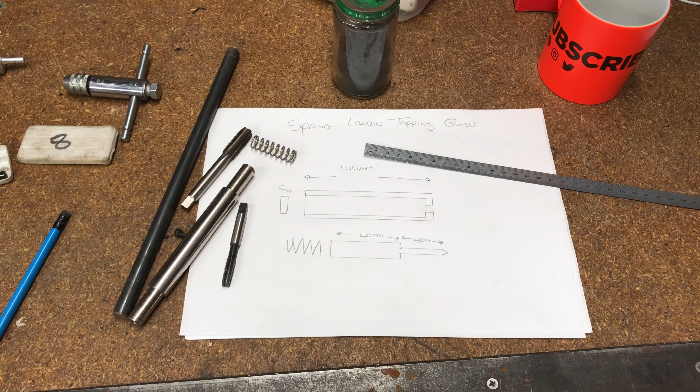I've been going through the scrap bin, and today I'm going to make something that I've sort of needed for a while but managed without it, and that's a spring-loaded tapping guide for both my lathe and the pillar drill. Most of the stuff I've already got. There's a little CAD drawing I've done.

The idea is I'll have a barrel about 100mm long. I'm going to drill it out to about the diameter of this steel, which is 13mm. It's only mild steel. Couple of springs, put a cap on the end of the barrel. This is, I'm going to call it a piston. It's not going to act as a piston, but nevertheless that's what I'm calling it. That'll be a snug fit inside the barrel, be spring loaded.

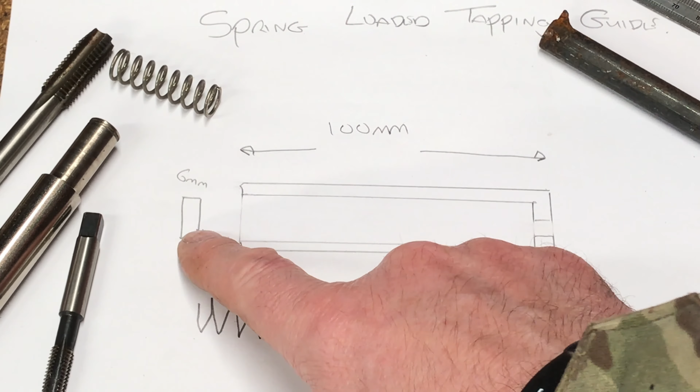I haven't got the necessary tap and dies to put a screw on end onto this device, so I'm just going to have a push in steel cap. So once it's in, it's in. When I say a steel cap, it's going to be like a steel bung. It's going to be press fitted in there with my 12-ton press.

And the idea of this, as you're probably aware, what I'm going to use it for is squaring up taps as I make threads in steel tubing, etc., or plate. So rather than having a drunken thread going in, hopefully this will be a little bit squarer. I have managed, like I said, but there's some scrap lying around the workshop, so there's nothing wrong with repurposing, and that's what I'm going to do.

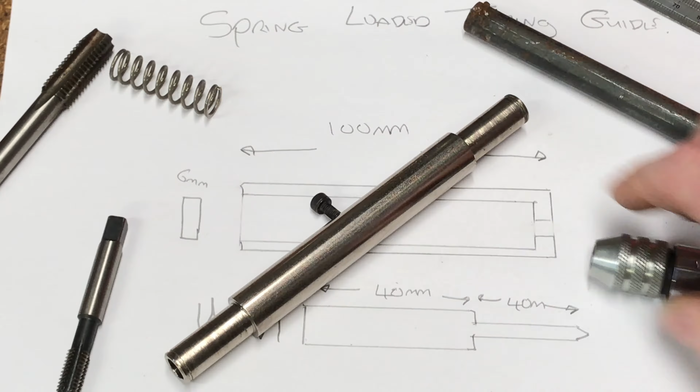So I think the first thing I shall do, this little bit of scrap tube, I'll cut the ends off it, drill it out to approximately this diameter, but leaving a little bit shy so I can machine this to a nice snug fit. Then we get a little bit of a point on the end. Again, the dimensions are approximate. I will draw this up a little bit better and put it on my Google Drive, should you be interested.

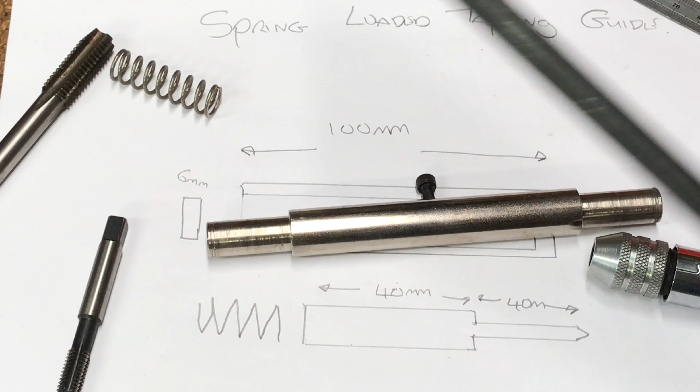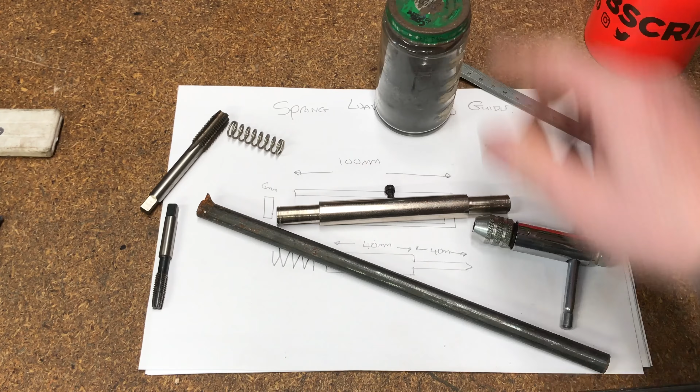Then at the end, to harden this piece of steel up, I'm going to use some stuff I used at school many years ago and still have a little jar of it. I believe it's called Kasenit. The idea is you heat the metal up, you dip it in here a few times, and it'll give you a few thou, if that, of extra carbon in the steel. So basically you're case hardening it.

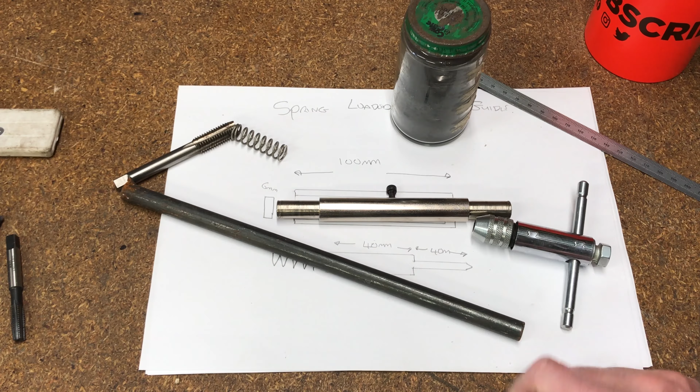So for my purposes, and the very few times I'm going to be using this, a little bit of case hardening on the tip here will be absolutely fine. It's not under any load as such, only the spring tension, so I don't think I'm going to have an issue with wear and tear, even if I didn't harden this piece of steel. So anyhow, we'll get over to the lathe, we'll cut a few bits off, drill a few holes, and we'll kind of show you how we're going on with it.

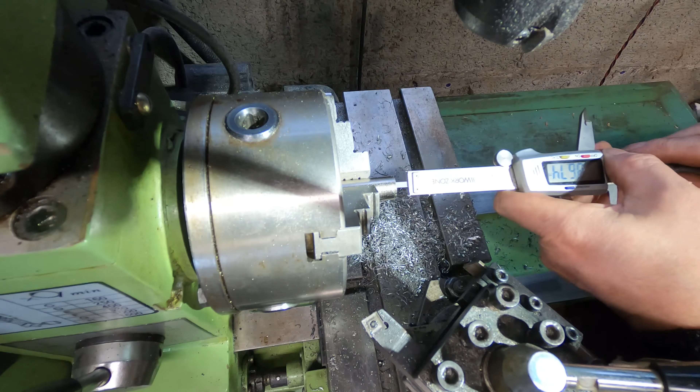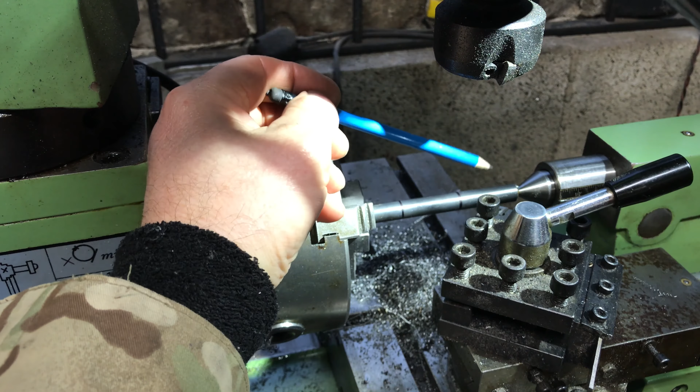Okay, we've got the workpiece in the lathe. Not ideal how I've set it up, but I think it will be good. I've got a dead centre here. I think what I could really do with is a live centre. I think that's what they call them. But this will stop a little bit of chatter. The bar's out quite a way.

This part, 14mm here, I want to take down to about 8mm. This I only have to take a fraction off, about half a mil. Ideally I'd do this section first, but I want to do the 8mm to make sure I get a nice fit into the tube. Doing it the other way around I won't be able to do that, so I'm going to take this down to about 8mm, this to just under 11.5.

So that's the plan. Then this end I'm going to put a 60-degree point on it, if you want to call it that. So yeah, I'll move the camera around so I can actually get to the lathe, and here we go.

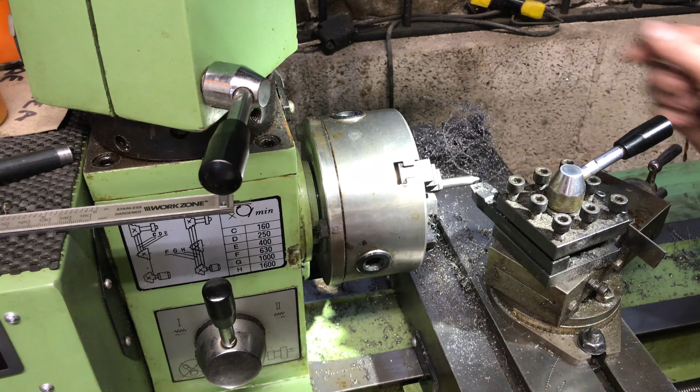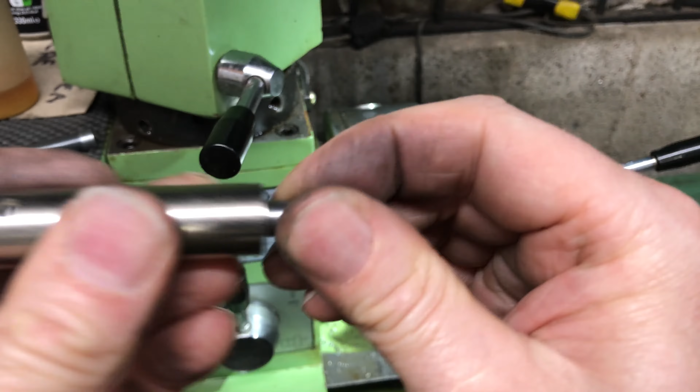Okay, that's not come out too bad, I don't think. The piston, I call it, is just catching a little bit inside, so I'll just need to free that off. But the point's come out alright. This finish is very good here. The thicker diameter, a little bit rough.

Don't know whether that's down to chattering or if I lost the edge on the tungsten tipped tool I use on the lathe. But I still got a fairly good fit in here, and that's what I'm looking for. And this end is particularly well, quite a bit tighter, which is what I want. Like I said many times, I don't work to fractions of inches, not in the garage, but I still, you know, personal gain, I want it as close as I could possibly get.

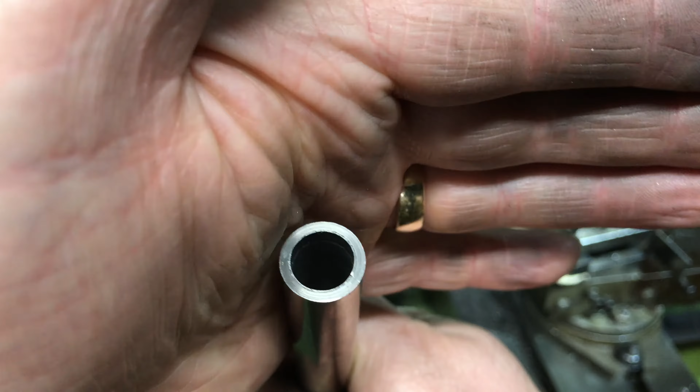So what I'm going to do now, just free this piston off a little bit. I'm undecided whether I'm going to see if I can get a tap to go in the end. I've lost the 12mm tap that I had. Otherwise I could have put a thread in there and put a set screw or a grub screw in the end, so it's removable easier. Failing that, I'm just going to do approximately a 12mm bung and push it in, and that should be good because this hardly wants maintenance.

There is a hole in the scrap bit of metal I've used. If needed, I can run some oil in there. But what I want to do as well is, as I said before, case harden just the tip. The rest doesn't matter. It's not an industrial tool. It's not going to get used 100 times a day. So if I can just case harden the tip with the Kasenit I've got, that'll be a plus as far as I'm concerned.

Also in the post from eBay, I've got some cold bluing liquid. You basically clean the surface up, paint it on effectively, and it'll turn black almost immediately. So it's going to have some rust protection there. So anyhow, I'll set it up and we'll see if we can case harden the tip there. And I'll take you over to the bench and we'll do that.

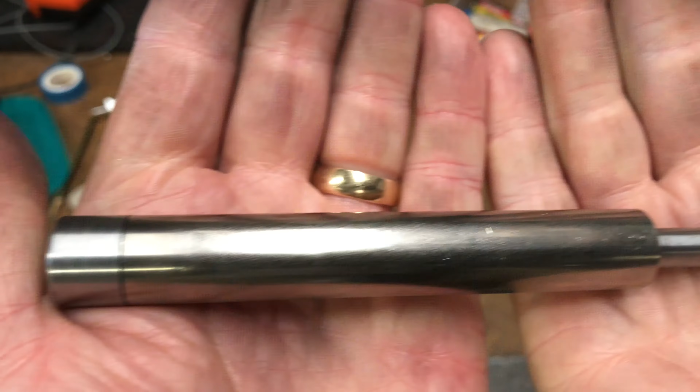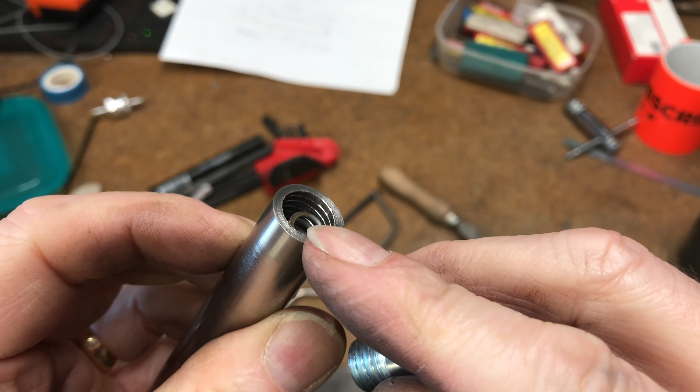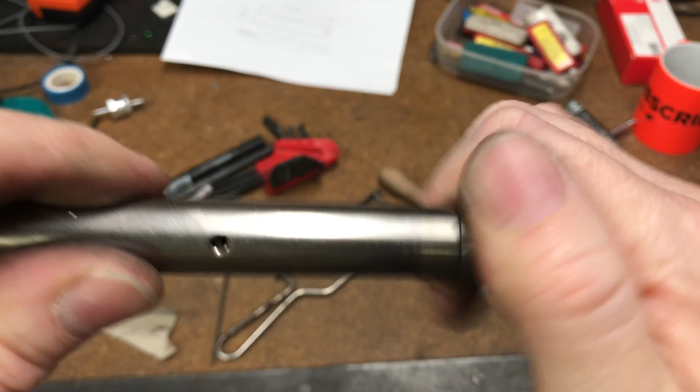Well, there you go. That's all together now. I did find the 12mm tap, and all I simply did was put a 12mm thread in the end here. Found a 12mm cap-headed bolt. Cut the bolt down a little bit. Put that back together for you, and machined it flush with the tube, so it's not going to foul in the chucks. The spring tension is good.

I think probably sufficient. If not, I can always increase the spring I put in there, put a stronger one in. Now I'm going to go and cold blue it, so it's going to have some rust resistance too. So that's what we'll do now.

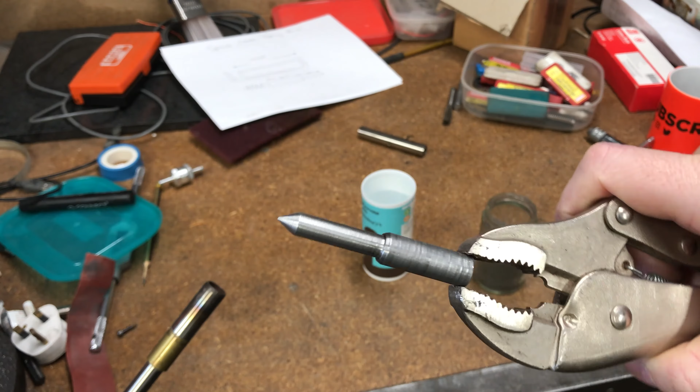Right, this is where we're going to case harden the tip of this thing. I've got a blow lamp set up here, a little jug of water to quench the tip in when it's done, and the Kasenit in a little jam jar. The idea is you heat the tip, in this case so it's cherry red, whack it in the Kasenit, swirl it around a little bit, then quench it immediately.

Or if you want a deeper thickness of the case hardening, put it back in the Kasenit, heat it cherry red again and quench it. You repeat the process a few times to give you a thicker case hardening. So that's what we're going to do. I'm talking now before we put the blow lamp on because it's going to be a little bit noisy. But here we go. Might take a while.

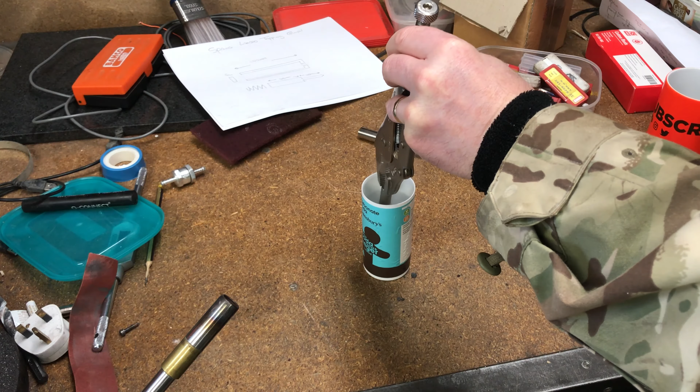One last time and we'll quench it. We'll let that cool down a little bit and we can see if it has actually hardened the tip up. Give it a little bit of a clean up. Hopefully it's not destroyed it. We'll let it cool down.

Yeah, that cleaned up quite nicely. I don't expect you'll get this on camera, but the feel, the drag of the file, that just feels like mild steel. You definitely drag there. Yet up here, this area, there's a lot less resistance in the sense the file just skids over the metal.

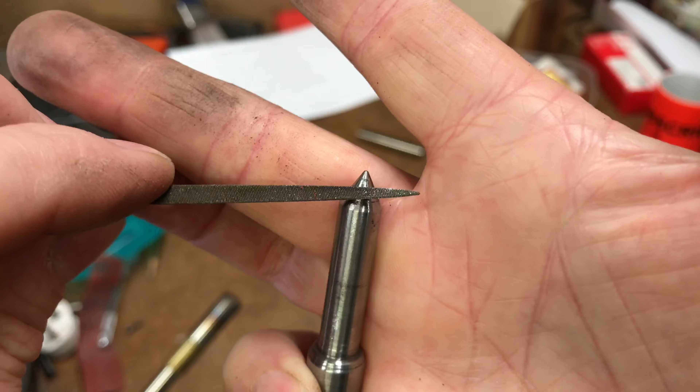Here it drags there. I could file it still, but it's definitely harder here than down here, and that's all I'm looking for, that the tip of this piston, as I call it, just to be a little bit harder, so it should last longer. It'll see me out, that's for sure.

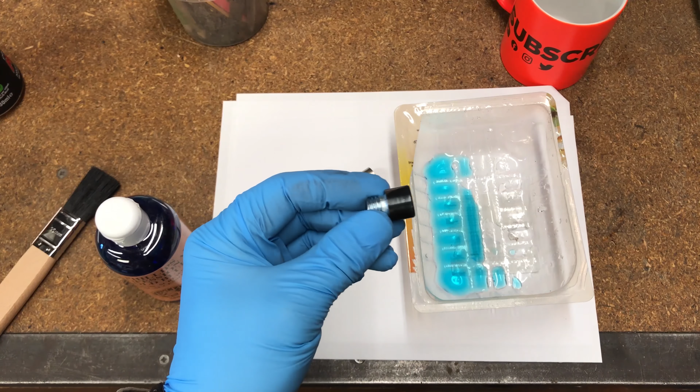eBay have delivered, and this is what's arrived. Philips Professional Cold Blue. As I said, what I want to do is blue the parts. That's the terminology, I believe. It basically turns them black. Now the instructions on this say mix it 3 parts of water to 1 part of this. Now I'm kind of trying it just neat, and I've just dipped that in and it's gone black straight away. So I'm not quite going to follow the instructions.

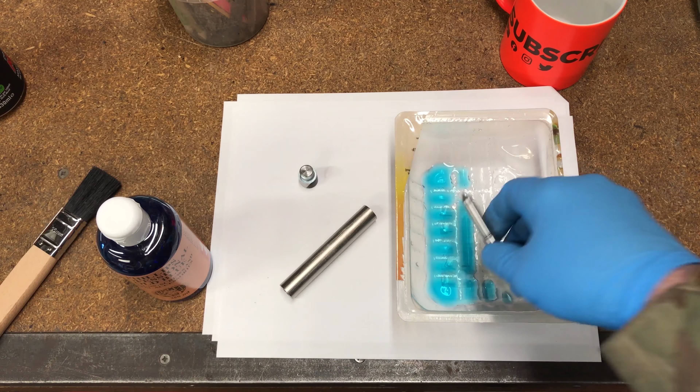I have thoroughly degreased these parts. There's not a spot of grease on there now. I use isopropanol to clean it with clean white rags. So all I'm going to do now in the neat solution is just roll that around. And that's going the colour I'd like it to go. That's a nice shade of black.

It does say on the instructions over 3 minutes it'll get darker. Then after that you rinse it in water and spread with an oil that they sell. Basically I'm going to be putting on WD-40. I might even just soak it overnight in some 3-in-1 just to let the coating fully harden, because it's not sort of immediate according to what they're saying. It's a build-up of the colour plus a hardening over a period of time.

Now, a slightly different colour going on there. The tip is a different colour to the rest of the body. The rest of the body we're not going to see, so I'm not overly worried about that. We'll drop this bolt in. Well, it was half coloured when it went in, now it's fully coloured, so it don't hang around too long. As I say, it's the first time I've used it, so experimenting a little bit.

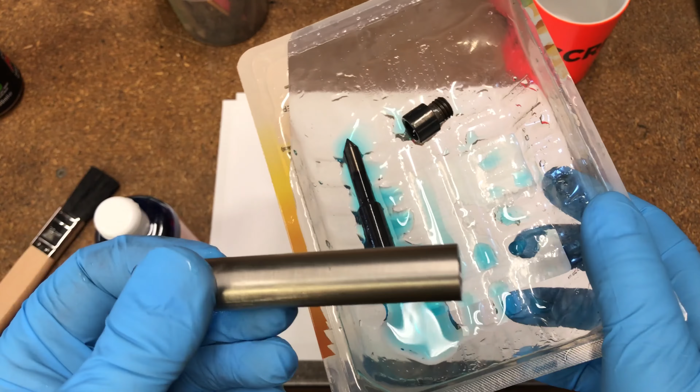But if you look at this, it's silver, no rust, clean metal. You dip that in there. That don't seem to be taking quite so readily. That may take longer to go. I hope it does colour. Yeah, there is a colouring going on. That other metal in here went straight away. Don't know why that's taking longer.

But I'll do what it says and leave it in here. It does say go over with a little brush and short strokes, kind of agitate it. I did roughen the metal surface up on the body. It is turning colour now. You probably can see it is going a little bit darker. Don't really help not having quite enough liquid in there, so put a little drop more in. Well, I'll let this carry on, leave it soaking for a while, and I'll show you the finished results. But it's working.

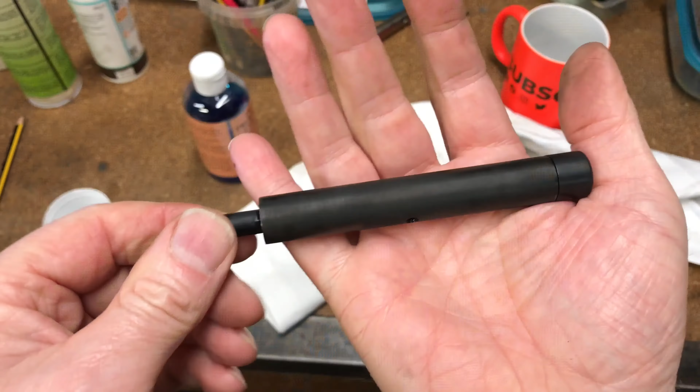There you go. You've got to be meticulous with the cleaning, and this part, the barrel, must have had some sort of coating on it. I had to take it to the lathe and put some emery cloth on it to get it really, really clean and get that coating off. There's a couple of little places that's missed, but you can see there, I think that might have been me with a greasy finger.

But nevertheless, it's complete. It was made from scrap. It's going to be just what I need for when I'm on the drill press and tapping away. Also, the lathe will be quite useful. So yeah, there you go. That's your spring-loaded tapping guide, all made out of scrap.